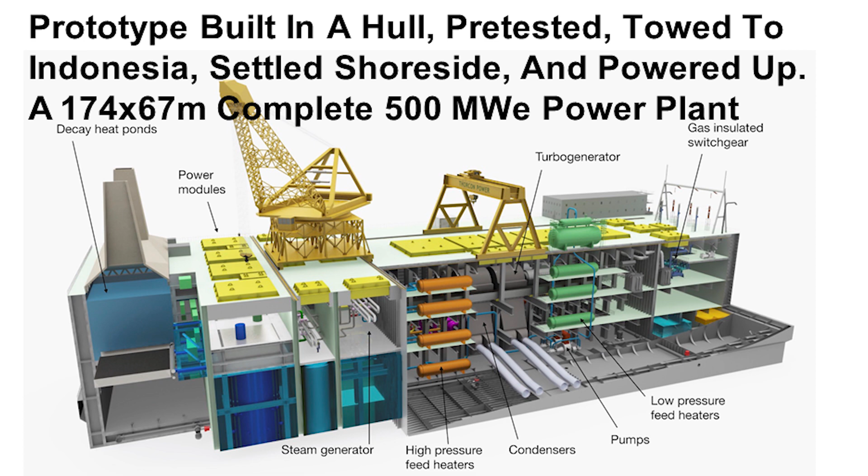So what is our intention here? Our intention is to produce, at least for demonstration purposes, a prototype that will be built in a hull, in a shipyard, under the block technology approach. We'll pre-test that, then tow it to Indonesia. Notice the market we have chosen is one that wants power, but does not want power based upon coal, because they have the example of China facing them. We will settle that shoreside and power it up.

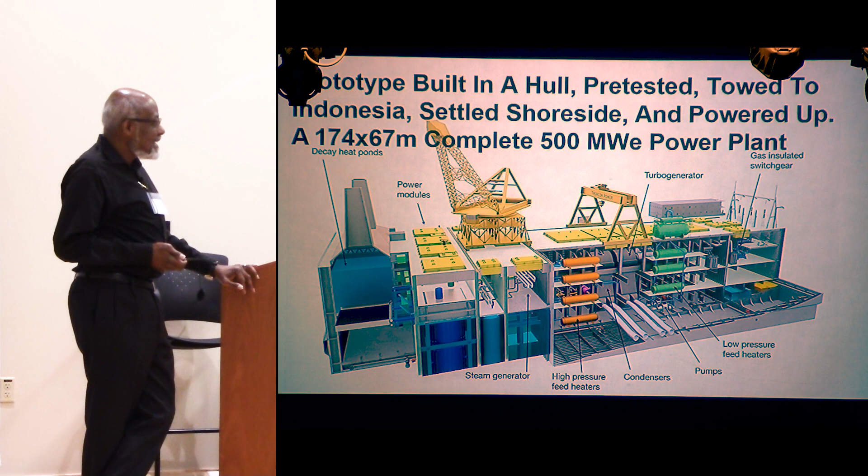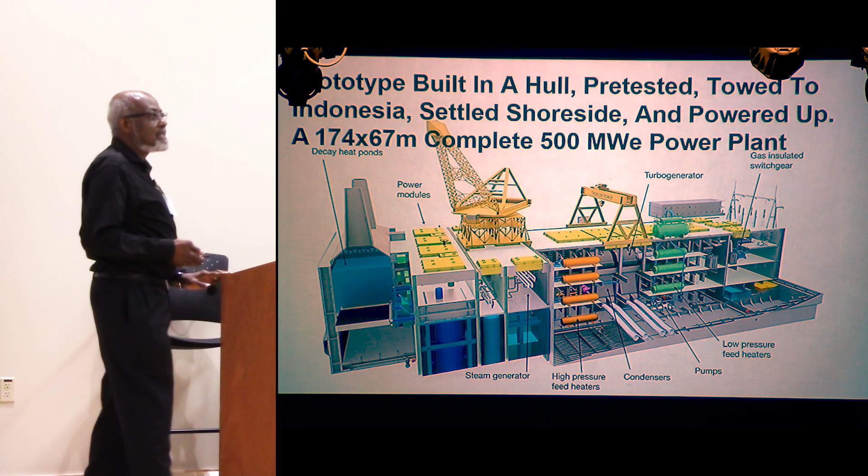So essentially, we plan to tow a 174 by 67 meter ship, if you want to call it that way. That is essentially a 500 megawatt power plant, to site it and power it up and demonstrate that. Once we have demonstrated that, we can then move on. So that's our present target.

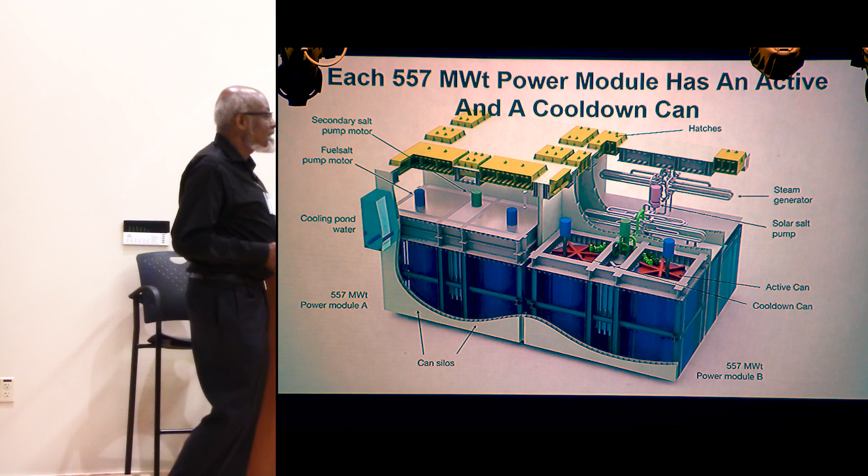Within that power unit, which represents about 557 megawatts of thermal energy, ThorCon's concept is that the plant will be operated such that each power module is composed of what we are calling 2 cans. We will be operating 1 can for 4 years, move the fuel over to the second can, and allow the first can to cool down in place before taking it out to take it back to the factory.

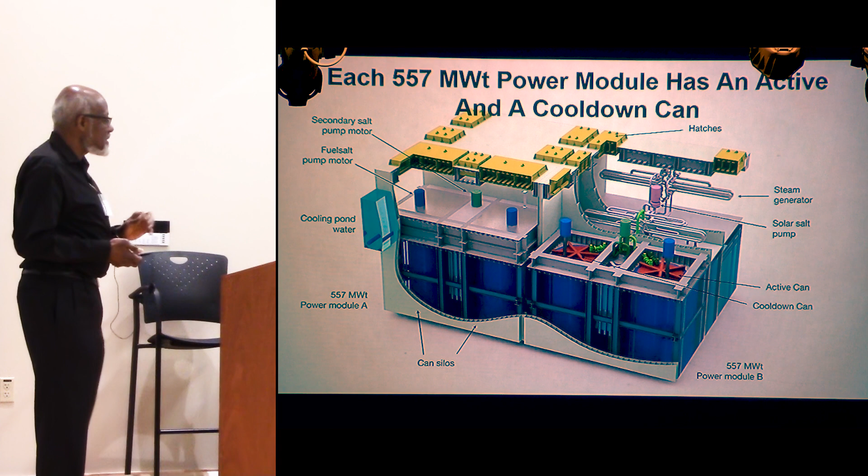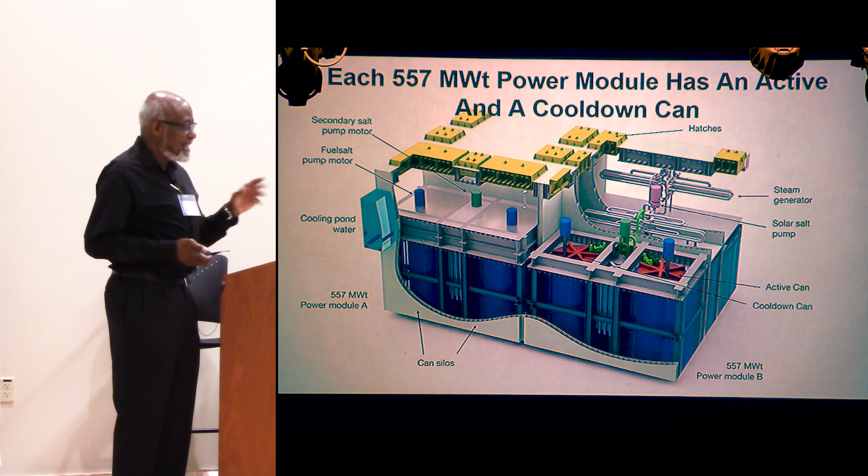So the modular concept is important to us, and you'll see why on my next slide, because that allows us to do things like ensure that we're going to get that reactor can out of the system before failure has occurred, assuming that we have done our modeling right.

So how do we convert the heat generated within the reactor? We have 3 salt loops. The molten salt loop, which contains the fissile material within it, exchanges its heat with a non-radioactive salt in the second loop, which then takes this heat across to a solar salt loop, the sodium potassium nitrate salt.

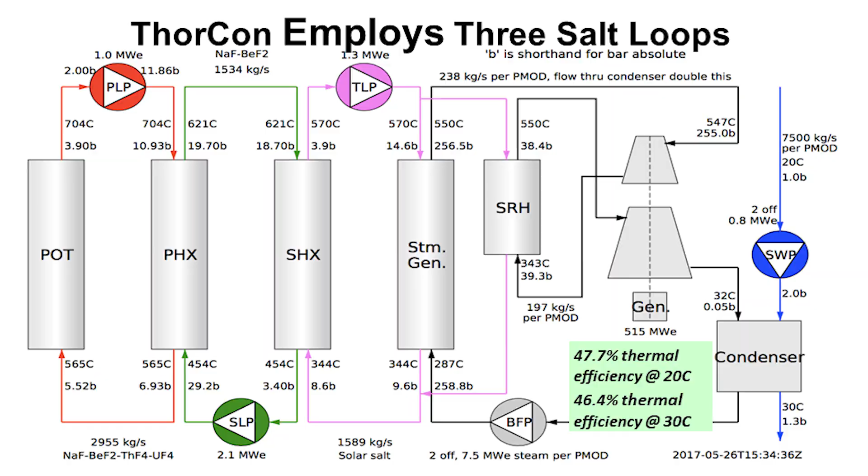Before that converts this heat over with a water loop. The reason for that sodium potassium nitrate salt is it gives us some isolation between the nuclear side and the non-nuclear side of the system. Secondly, any tritium that may have transported itself across, despite all those nice little tricks we impose to collect tritium, should be oxidized in the sodium nitrate salt, and therefore the small amount that gets there will be finally stopped.

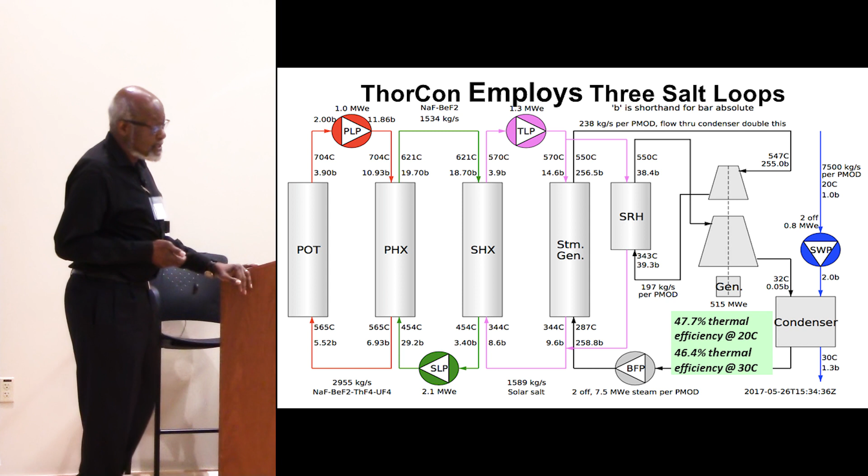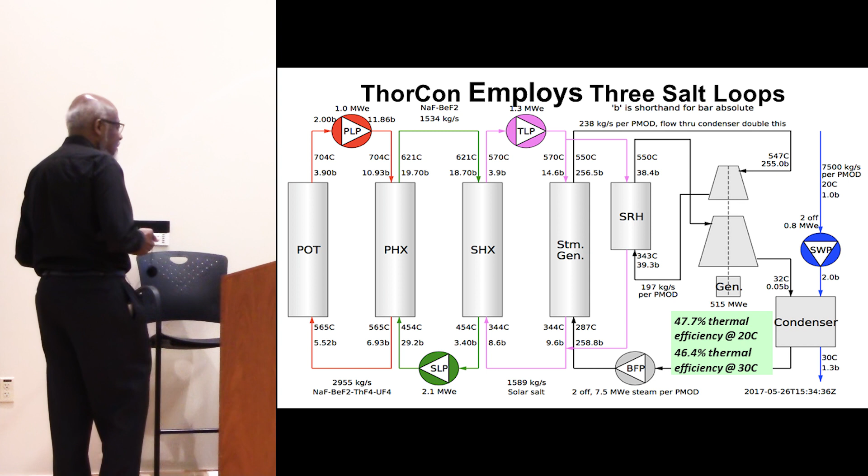Our overall thermal efficiency of the system as modeled is approximately 47.7%, assuming we have 20-degree input water, and a little bit lower, about 46.4%, assuming we have about 30-degree centigrade input water. Most likely we will be closer to 30 degrees in Indonesia.

Within that is the moderator. In our case, it's graphite, just like in the molten salt reactor experiment, up along which the molten salt flows. Below the pot are the same freeze valves as, or similar to, what was used in the MSRE, except we have gone to 4 on each one. We can therefore drain even if 3 fail; we can still drain. We have redundancy inside there.

It takes the heat away from the dump tanks. The cold wall operates passively. This is an absolutely passive device. You can shut everything else down.

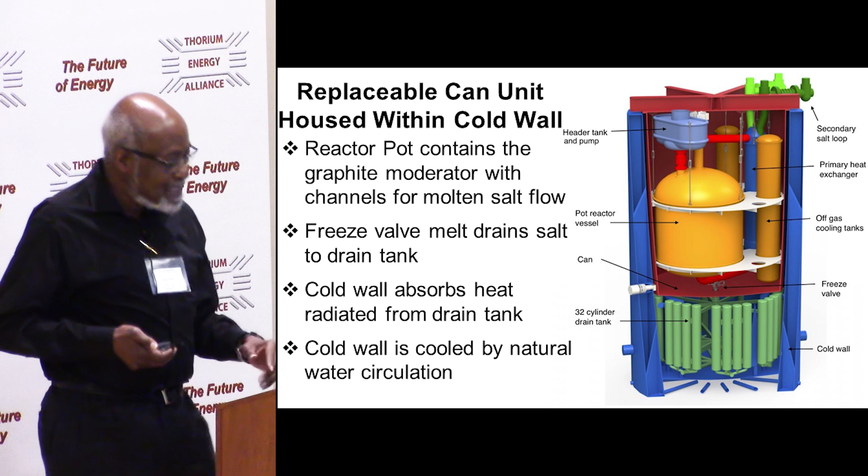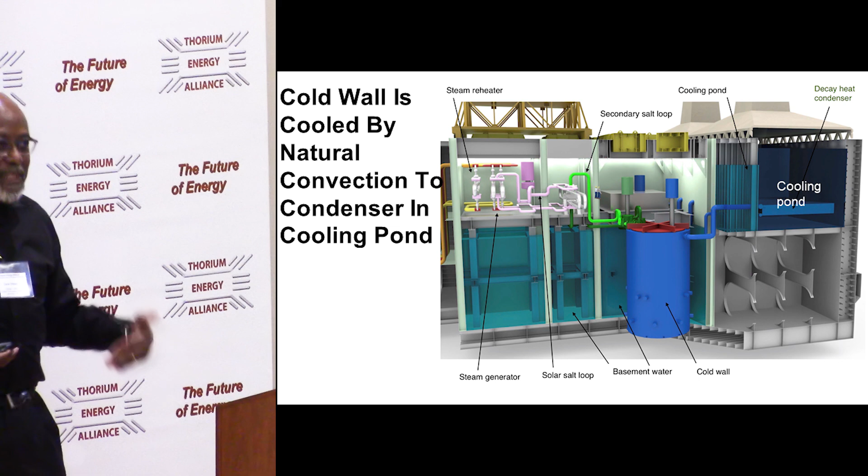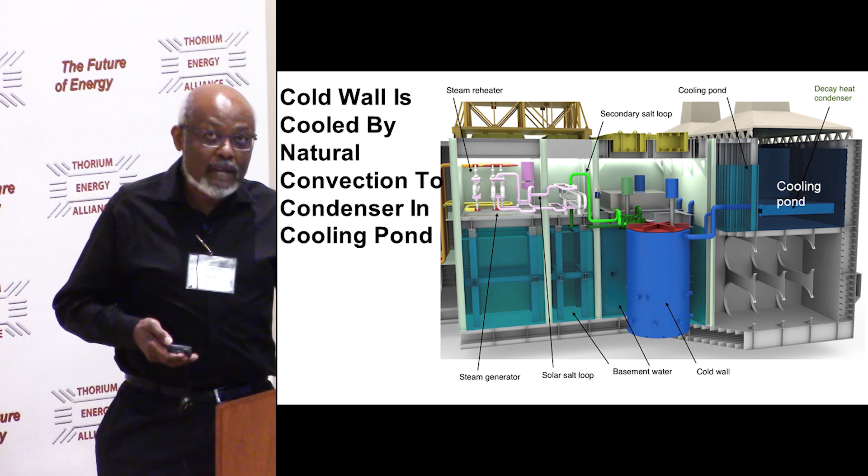So we can walk away from this plant for a long time, allow things to cool down if something happens, which is unlikely to occur, and still be okay without releasing anything to the atmosphere. And again, all of this is by natural circulation, no pumps to provide the cooling.

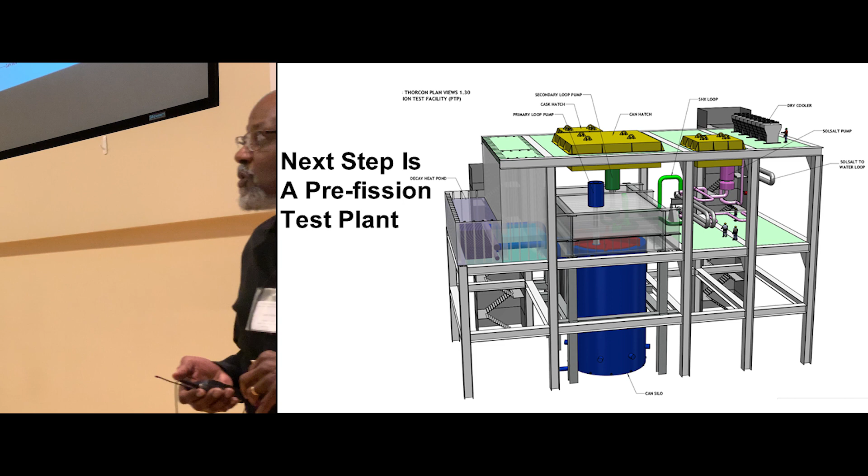What is the target right now? Our target for the next step is to build a non-fissile test plant using the same technology and by the block technology to build it. Once we build this, we will test this non-fissile test plant in every possible manner we can think of, and some we presently cannot conceive of, to ensure that physically and from a control point of view, in the absence of fission, we can control this pot, this arrangement, this non-fissile plant.

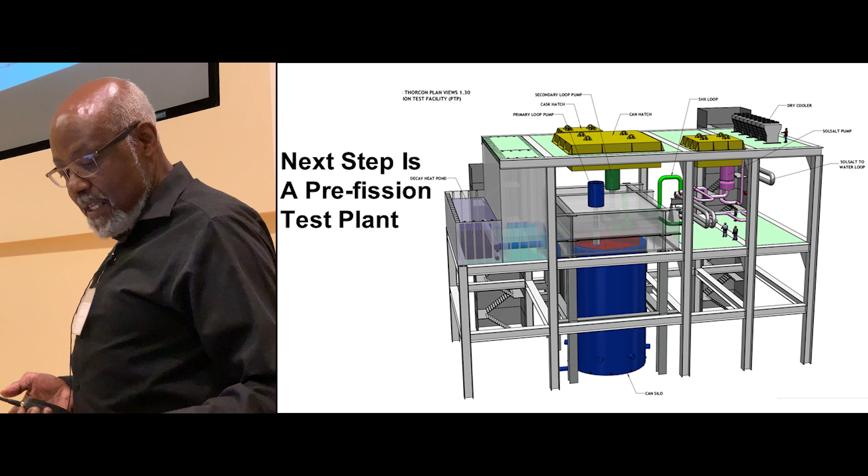Once we have completed that, we can then move on to a next step, which would be building a plant in which we would put fissile material into it and move on.

We've also had some simulation done for towing this hull through the North Atlantic storms. And you may say, wait a minute, you guys said you're going to Indonesia, why North Atlantic? If you can travel your ship through the North Atlantic storm, you are seaworthy for the world. If you can't survive North Atlantic storms, you are restricted in where you can ship your ship. So that's what it was modeled on.

We also have modeled an aircraft strike onto that hull and see what would happen, and I'll show you some results for that. We also have ongoing two GAIN projects with the Argonne National Laboratory.

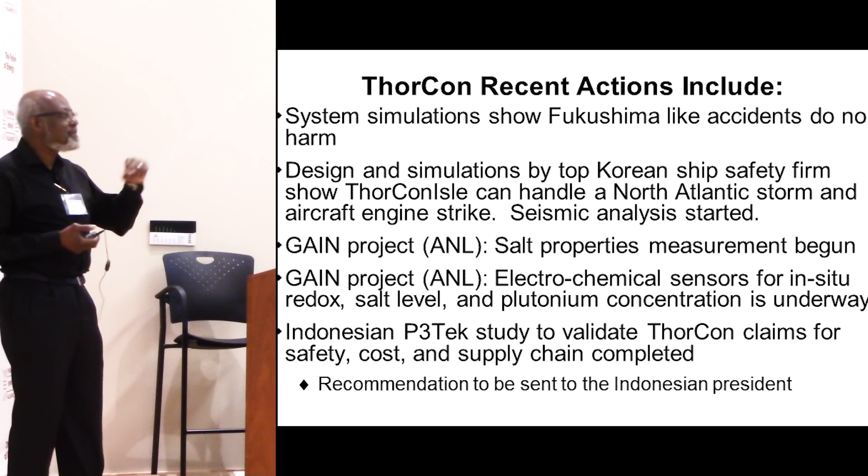One of them concerns salt property measurements. We are not using the molten salt that was used in the molten salt reactor, which was FLIBE. We have a slightly different system - right now it's a sodium beryllium fluoride salt. Therefore we need some properties taken from that. Now, mind you, work was done on that back in the MSRE days. There are numbers out there for it, but there are some properties we need that are missing. So we are trying to get those measured.

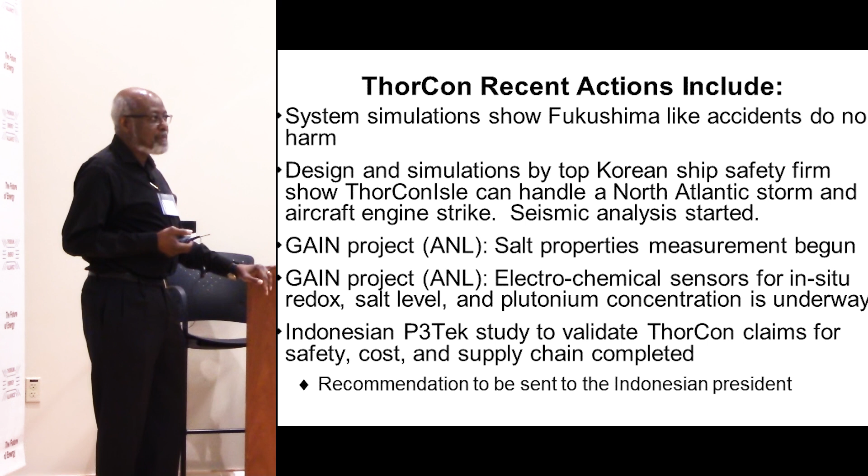The second project at the Argonne National Lab is some development of electrochemical sensors in order to measure chemistry, measure redox potential. The redox potential is critical for us in controlling things like corrosion and other reactions within the system, and solubility of fission products in solution, et cetera.

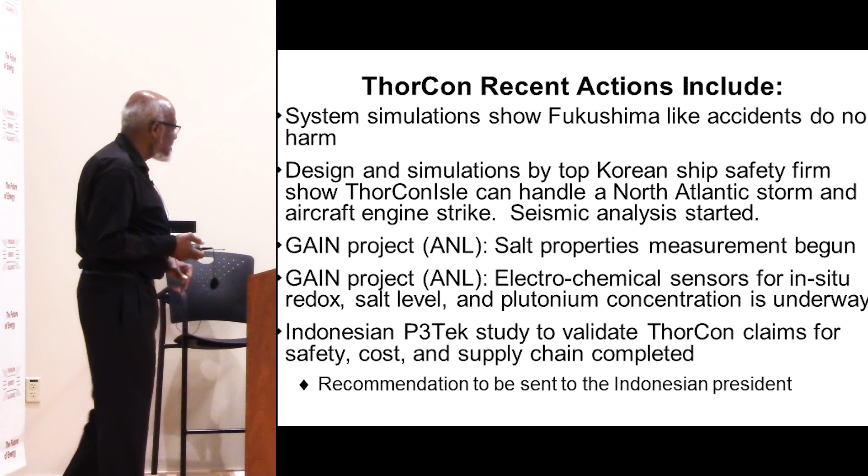One of the things we are also extremely interested in is, can we detect the evolving plutonium level in our salt? Remember, we're going to be trying to detect a very, very, very small quantity of plutonium in a vast sea of uranium. So this is an interesting question as to how that can be done. But if it can be done, it gives us another way of keeping track of what's in that fuel and what's going on with it, so we know how to handle it.

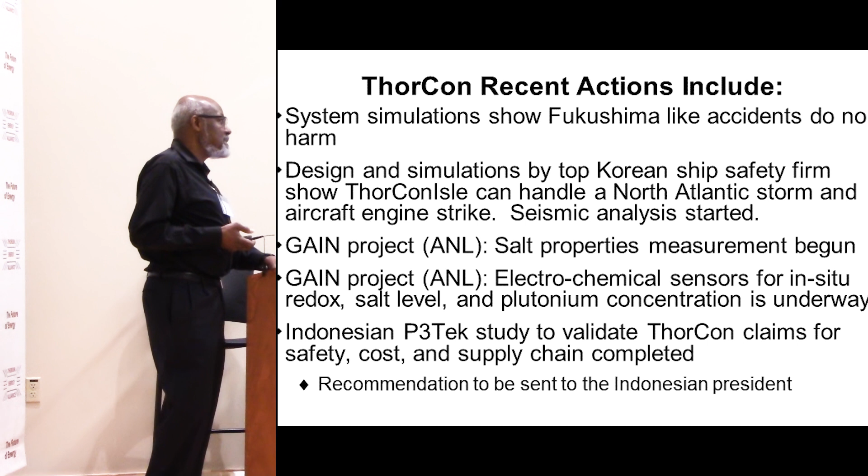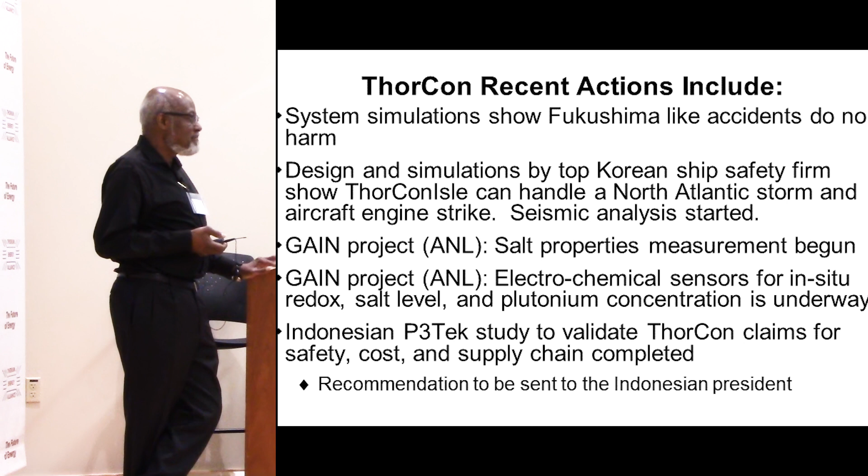The final thing that has occurred recently that I want to talk about, I shan't present any actual data on, is a study performed by the Indonesian agency P3Tek for the government in Indonesia. They looked at whether ThorCon's claims about its safety, its cost, its supply chain, etc., were truly valid. Are we selling a case? Are we overselling our position, overselling our case? That report, that 8-month study, came back and said, oh, ThorCon is not really overselling. Those guys know what they're doing, and they're presently writing up that report. It is our understanding that they will make a recommendation to the President of Indonesia to move forward with ThorCon as the nuclear plant for Indonesia, the first nuclear power plant.

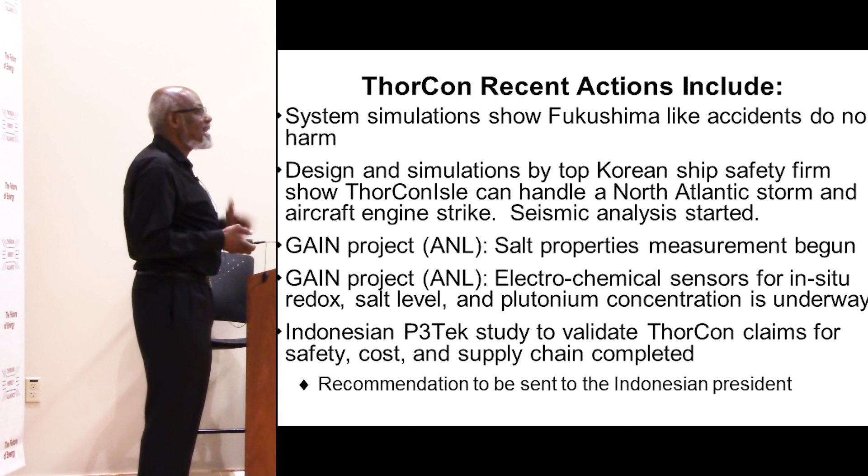I should back up. Indonesia does have isotope medical production reactors.

Stepping back to the first one on that slide, the ThorCon Fukushima Response, what the analysis shows is: let's assume we have the first case. Earthquake occurs, and the earthquake sensors on our system trigger the freeze valves to open up, and we begin to dump the salt.

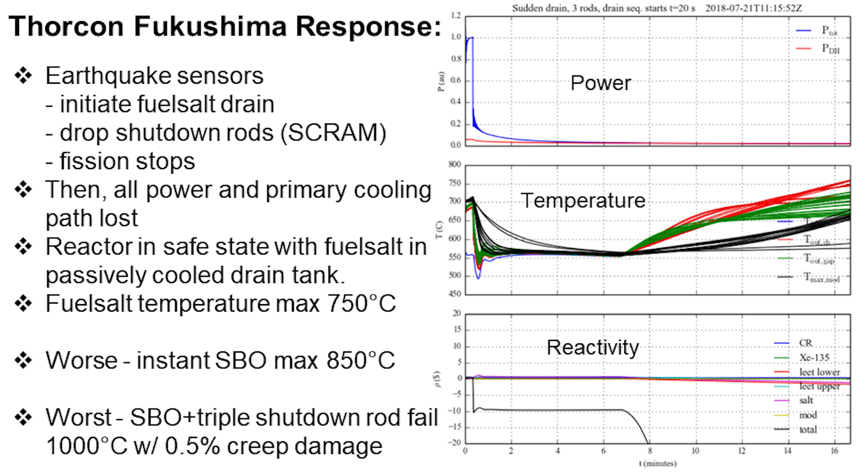It also releases the shutdown rods, 3 of them. They're redundant; we only need 1, but we have 3 for redundancy. They release the rods, open up the freeze valves, and we begin to dump the salt. We therefore know we have lost all power, and we have lost all cooling in the primary loop as a result. Essentially, what is the end result?

The end result is that the reactor is in a safe configuration. The salt is in the dump tank, radiating heat quietly, passively, to that cold wall. The reactor is safe. Our calculation says we are approximately 750 degrees max in the fuel, the maximum temperature, not for very long, but that's the max we achieved. Our system can withstand that without a problem. In fact, we could probably go back up and restart that reactor. We will restart that one.

A scenario above that is you have a total station blackout. So you've lost power, you've lost your auxiliary boilers. You have no power. In this particular case, we make the assumption that because of that, what we have is...

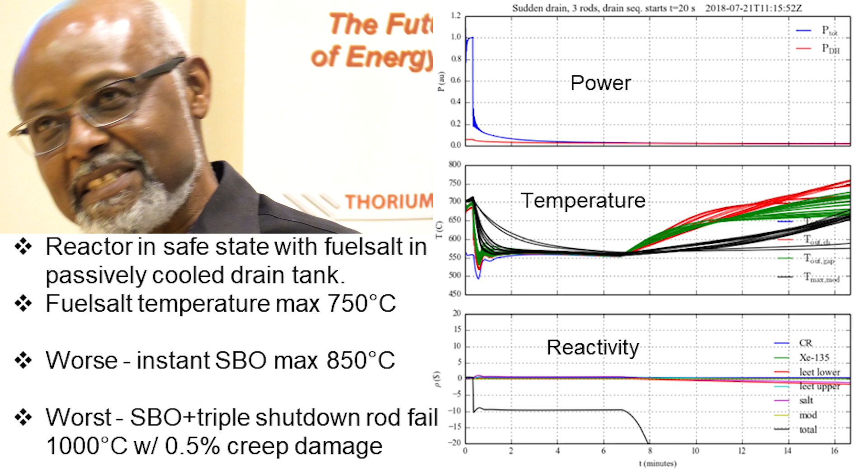The shutdown rods still release, they come on down. Of course, the temperature is rising even though the shutdown rods are down. So the freeze valve will open up, we dump the salt, and the reactor is once more in a safe configuration. Radiated heat now goes lovely to the cold wall, and we are good. Maximum temperature in the fuel as a result is approximately 850 degrees C. With the materials we are using, we're not particularly concerned.

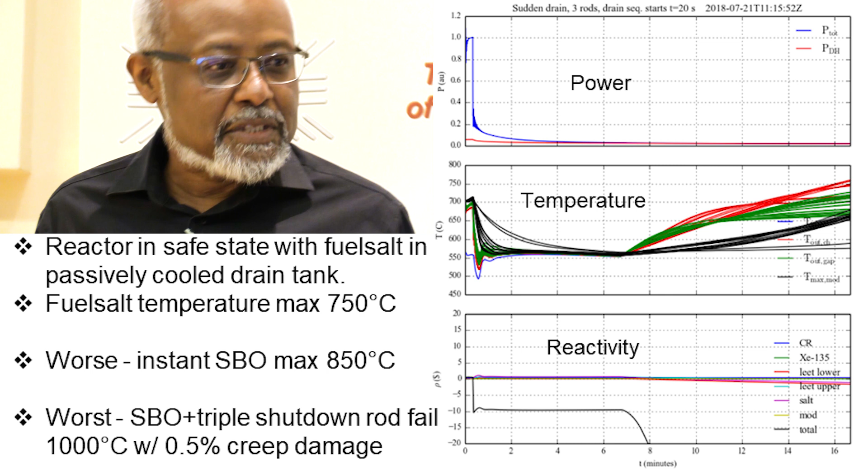The third scenario is the worst one, where you've also lost power, a total station blackout, but now your rods don't release. The SBO case, they just stuck. All 3 rods stuck. Remember, we only need 1, but all 3 of them are stuck. In that case, our maximum fuel temperature rises to 1,000 degrees C. Again, the freeze valves will open up and dump the salt, but we have gotten to 1,000 degrees C.

We end up with about 0.5% creep on our materials. For all the mechanical engineers and material engineers on site, no big deal — 0.5% creep, it's almost like, okay, that occurred. However, we will replace that can because the control rods failed to release. So we will condemn that can, take it out, move on, and reinstall a new can inside there.

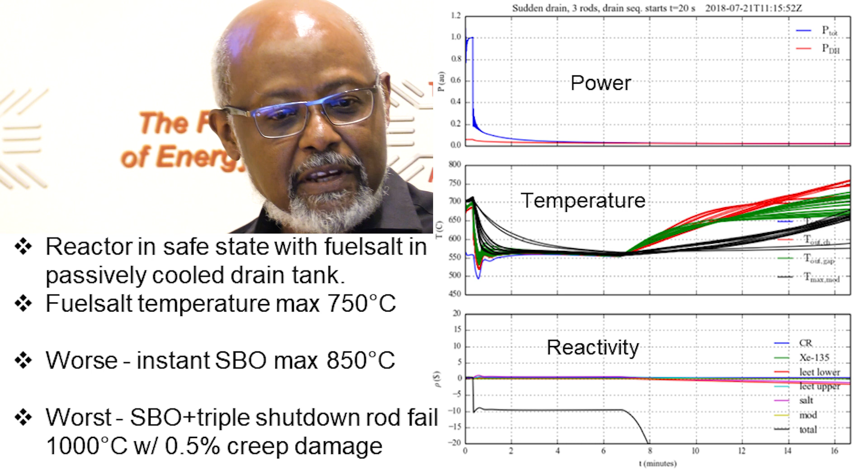Notice that in the particular scenario I'm showing, which is the very first one, we are looking at about 7 minutes before we begin that release from the system.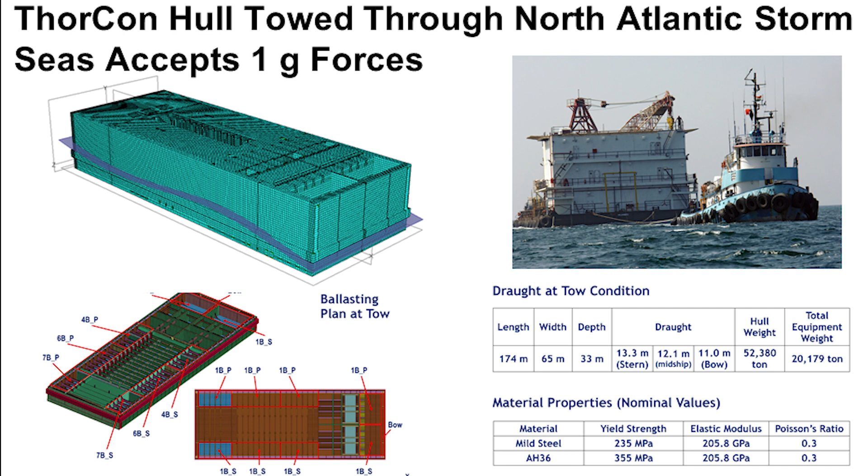Moving on to the second analysis done for us: towing the hull through the North Atlantic storm. Analysis shows that this vessel, this hull, whatever you want to call it, can withstand 1 G forces for days. Let me repeat that: 1 G forces for days, and it's fine. A typical reactor requirement is about 0.4 Gs for seconds, at most a minute. So we can really rough this thing up and get it to where it's gotta go, and it will function.

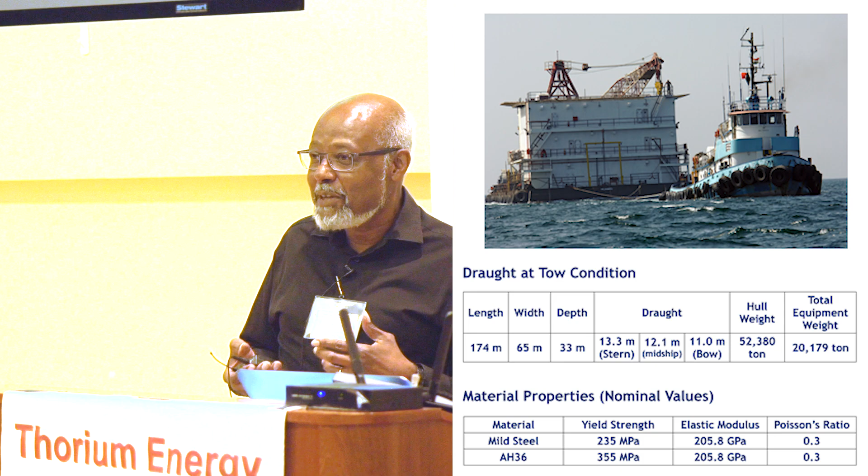The third scenario looked at is the aircraft strike — your scenario of 9/11. The aircraft comes flying into your building. An aircraft, for all intents and purposes, is a skin on a frame, so the main damage comes from the engines. Of course, in 9/11 the fuel also caused a problem with heat generation. But here we are flying an 8-ton engine into our vessel, and the 8-ton engine strikes our vessel.

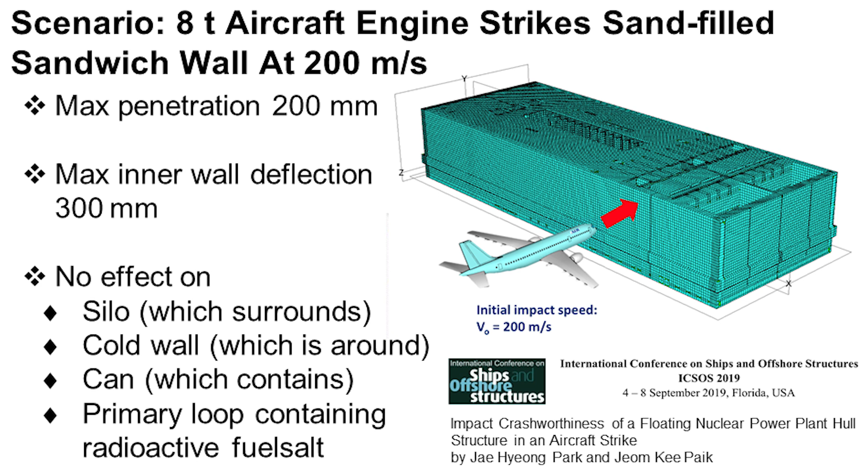Our sandwich structure with sand filling — it would be the same if we had concrete inside it, but with sand there are reasons for using it, because you can then pump things out if you need to refloat. With the sand inside, the maximum penetration when that engine hits the structure at 200 meters per second is 200 millimeters, that's your maximum penetration. Our maximum deflection on the inner wall of the sandwich is 300 millimeters. Again, not much. The net result is that we have no effect as a result of that strike on our silo.

Okay, so you'd say that's great, but remember, the silo surrounds the cold wall, that important mechanism we have for keeping the reactor cool. So that's fine, and the cold wall surrounds the can, so again the can is fine. We may want to do some inspections, but the can is fine. Within that is a primary loop containing the fission products and the fissile material, and that also will be fine as a result of the aircraft strike.

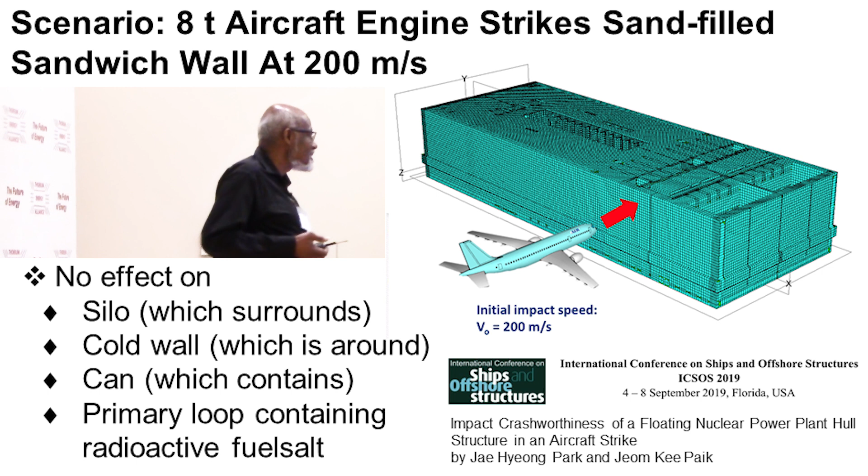So the net result of all of these analyses is that, so far, our projections are correct, and we will keep on going. We keep on moving, going down that long and winding road, as all of us in this business know. But we keep putting one foot in front of the other, and we're moving forward. Thank you.

Did the Indonesian nuclear regulator have a look at your design and provide any feedback? Minimal look at the design. That is the follow-on step to the present review that Bapeten had looked at. They did not look at the detailed aspects of the design from a reactor physics performance point of view, but they looked at it from a safety point of view. Does it meet the safety requirements?

Dane, how many of these reactors can you generate with your current model? Let's say per year or per decade or whatever. A small, efficient shipyard can generate somewhere between 10 to 20 plants of 1 gigawatt size per year.

When will you have your first commercial plant operational, or at least one for concept purposes? What Indonesia would like is that they can say they will have a commercial plant producing electricity for them by 2026, which means we have to have a demonstration plant that we can test in all possible failure modes somewhere in the time frame of 2024 to 2025.